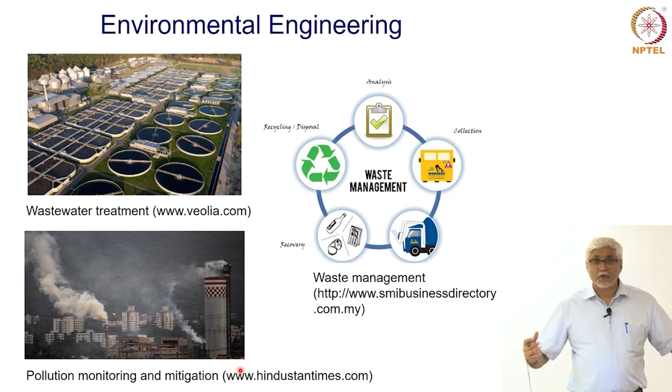Another aspect of environmental engineering is pollution monitoring and mitigation. As urban environments and cities come up, we pollute air, water and groundwater. Monitoring this and mitigating it is very important, because just knowing that this is happening is not enough. We have to see how to stop it and make sure pollution does not keep increasing, otherwise our cities will get dirtier, the air we breathe will become more difficult to breathe, and our groundwater will become contaminated and spread to the environment around these cities.

So environmental engineering does all this, aiming to protect and improve the natural environment where we all have to cohabit, work and live. It draws upon basic sciences like chemistry, biology and fluid mechanics, since these are required for designing and operating the systems built for providing drinking water and treating municipal as well as industrial waste. Depending on where the waste comes from, the treatment may be different. We have to see what the contaminants are and how they can be treated or handled before the treated waste is sent back into the environment.

This also brings up the very importance of a civil engineer knowing chemistry well. A lot of environmental engineering processes draw on chemistry and the understanding of chemistry as much as we are concerned.

The other aspect is monitoring and modeling of the environment. There are many processes that we have to say how they will evolve over time, so modeling is very important. We have to understand the phenomena and see how they will affect the world in future. How much will temperature increase? How much will the carbon dioxide in the air increase? And if so, how are we going to stop it? How are we going to limit it? And how are we going to mitigate it?

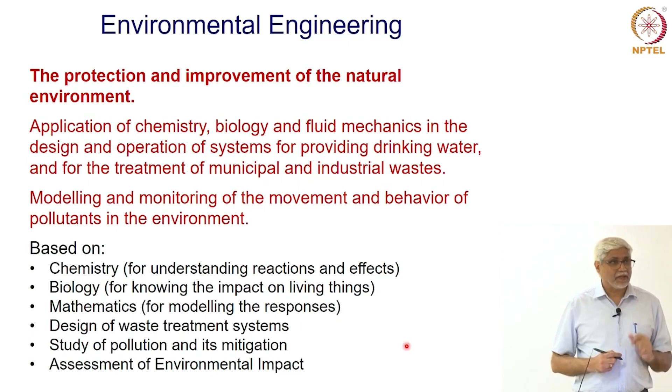And as I said, the different areas that we have to understand include chemistry - there are reactions, effects of these reactions have to be understood. Biology, because we are dealing with not only human beings but many other living things on the earth along with us. Mathematics is needed for the modeling. We need sophisticated models sometimes, which depend on many aspects of the environment to tell us how the pollutants will change, will spread, and how pollution will increase, for example.

And that will lead us to, for example, the design of wastewater treatment plants. For that, we will have to know where it's going to be situated, what waste is coming in, how the population producing this waste is going to change with time, and therefore see what would be the adequate design for the wastewater treatment.

I have already talked about pollution and its mitigation, and finally an important aspect of the design of almost everything that is large is the environmental impact assessment. When we have a large project, say a new township coming up, or a dam, or a canal, it is almost necessary to have an environmental impact assessment. How is this going to affect the environment in general? What are going to be the emissions? What are the resources that are going to be needed? And how will this change the environment where this is coming up? So this is again something that environmental engineers do.

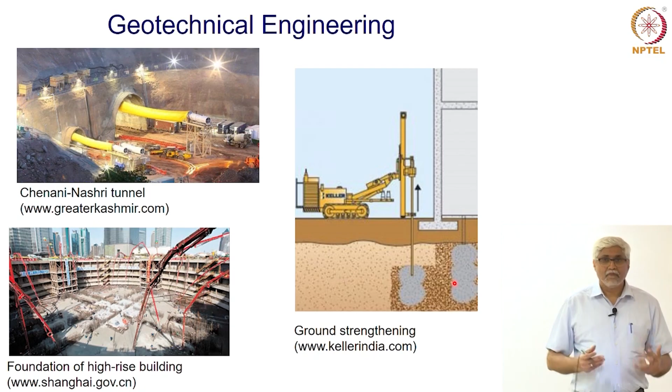Also, we have to understand that the earth itself can move - the ground can move when there is an earthquake, or when there is settlement. So we want to make sure it stays stable. There are techniques where you can strengthen the ground - ground strengthening techniques. If the ground is not strong enough for what you are going to put on top of it, can we strengthen it? You may not have a choice to say I cannot build here, I can move elsewhere. So we have to see how to make the ground strong enough for whatever we are constructing on top or within it.

Geotechnical engineers understand earth materials, whatever is in the ground, and see how to design safe foundations for structures that we are going to place on them or within them. So they analyze the behavior of soil and rock so that they can design these structures safely.

The structures could be high-rise buildings, pavements, underground facilities. We talked about tunnels. In India, almost all the major cities are having metro tunnels, and surely we will have these projects running for several decades in India and other parts of the world. These are structures which are mostly or at least partially under the ground. We have to make sure that the drilling process, the excavation is done safely, economically, and the structure once it's constructed is safe enough for transportation to occur through it. So underground structures are becoming more and more important.

We also need underground structures for containment of waste. Suppose we have radioactive waste, we have to store it safely. We cannot have leakages, we cannot afford to have this waste escape into the environment. So we need containment vessels, containment structures that will keep contaminated waste, or waste that could contaminate, in a protected place.

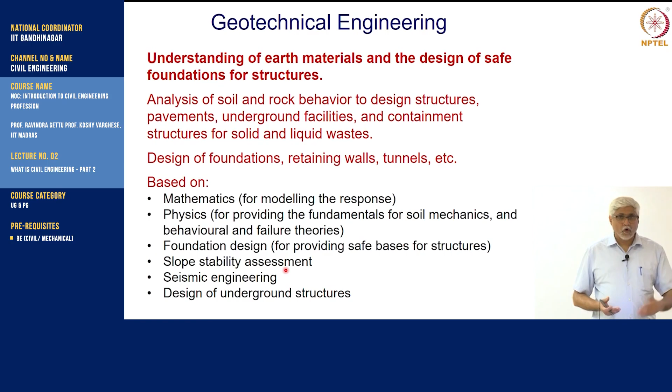Seismic engineering is everything to do with earthquakes. Earthquakes, as we all know, involve the shaking of the earth. It can be vertical, horizontal, and a combination. So if you have a structure sitting on the earth and the earth is moving, the structure could fail, the soil could become loose, liquefy, settle, crack and so on. We have to anticipate what could happen in a certain region. With more and more knowledge in seismic engineering, we are designing better our structures for such type of actions that come from earthquakes.

I have already talked about underground structures. The best example that is closest to most of us is metros. We use subways and we want them to be safe, because we cannot make transportation within a city without metros nowadays. So everywhere we have metro construction happening, and we want to understand the best way to construct and keep these structures safe.

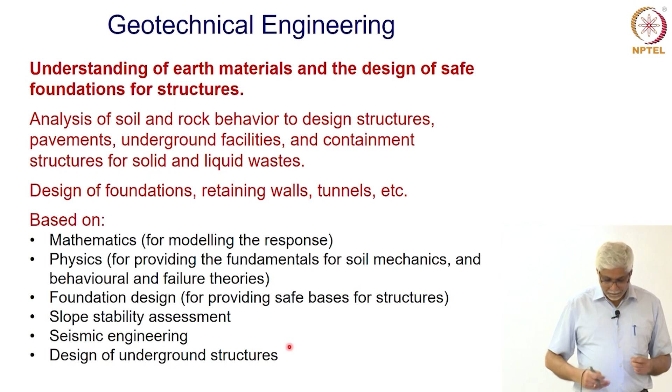Another aspect which deals with the ground is how water flows on the ground, hydraulics and water resource engineering. There are large structures like dams that have been built over the course of history. We still build large projects which involve dams, where water is stored for irrigation, drinking water purposes, and also to generate electricity. It is one of the cleanest ways to generate electricity. So we have several large hydroelectric projects which provide this pressure due to the buildup of water that can be used to generate electricity.

These are all massive projects because they involve making a huge reservoir that can collect the water, and the impact on the environment and on people is tremendous. So they have to be done properly and safely.

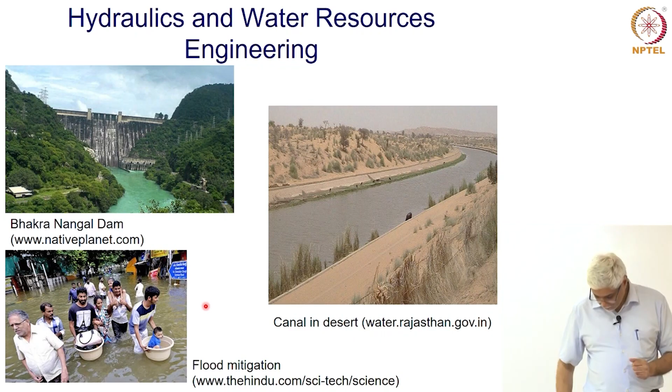So there is a lot involved in storing and conveying water. On the other hand, we are also worried about protecting too much water from coming into the city and destroying the city and its people. So the hydraulics and water resources engineers apply analytical methods, computers, and fluid mechanics to the study of flow of water and controlling this water, so that we use it when we need it and it does not harm us during its flow.

So flow and control is important, and we collect water, like dams, as I said, is a way of collecting water. We can have tanks and other facilities, and then supply this water where it is required, and this same can be extended to other liquids. There are civil engineers who work on the flow of blood in the body, because it is also a fluid. So there are many fluids other than water where these principles of hydraulics can be used, and civil engineers also work in these areas. They mainly do the design of hydraulic structures and machinery that is required for controlling water and moving water.

They spend a lot of time studying rainfall, especially in a country like India, where we have a lot of areas where we do not have water readily available. So we have to study when will we get rain, how much rain, and how are we going to store and use it properly, so that we can control its flow, decide the flow, and collect it.

Disasters happen and a lot of it is because of storms and floods. And there are many hydraulics engineers who study storms, see how they move, and even predict and warn people that there is a storm approaching, that there could be a flood. So even though we have designed well, there could be something that is beyond our control. So we can warn people that a storm is coming, we have to evacuate, we have to be safe, we have to move to higher ground so that they are not affected by floods.

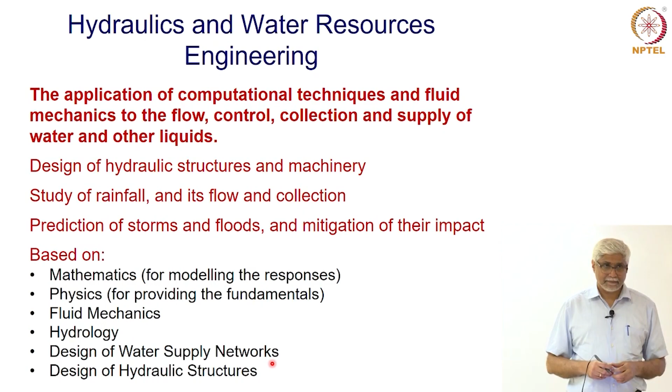So they base a lot of their work on mathematics, a lot of analytical work is needed, physics obviously, fluid mechanics is a special area of mechanics of physics that deals with flow of water, flow of different fluids, and the pressures it creates during its flow. Hydrology is the study of flow of water on the earth, and they end up designing a lot of water supply networks. Our cities are growing, new cities are coming up, we need to provide water. So the water supply networks also have to be designed properly, as well as hydraulic structures like dams and canals. So these are the different areas that hydraulics engineers work on. Next we would come to the area of construction.

Construction involves resources, materials, and processes. So the people who are involved with construction materials have to decide what material to use, how much to use, and how to use it.

So a construction materials expert has to know which concrete to use, how much should be delivered, how it should be delivered, and the construction technologist has to see what equipment is required so that this material will be delivered correctly and on time.

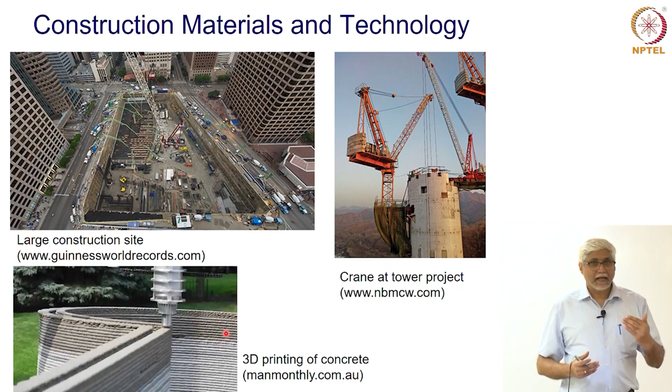So the construction materials and technologist will look at what materials and resources are required for the construction to be done properly and efficiently. The engineer who works on construction materials and technology looks at the utilization of the material and equipment to implement the design.

The design is given, now how best to implement it and make it happen. These could be structures or any other civil engineering project. They also have to take care of maintenance. Structures become old, facilities become old. How do we make sure they are in running and usable condition? When do we have to repair, and how do we repair these structures?

Design of new materials is very important. Just like our demands and requirements keep changing, we have to supply, we have to come up with new materials. So these engineers will look at new materials, construction methods, and how to improve the performance of the material. If we know that something is going wrong with a certain type of material, how can we make that better?

Quality of construction — we always hear a lot of complaints about construction not being good quality. So there are people who work on that and make sure this quality is improving. They draw on physics and chemistry to understand the behavior of materials, and understand what is there in the market, because in civil engineering you cannot use something very expensive that has to be brought from a long distance, because it makes the construction not feasible.

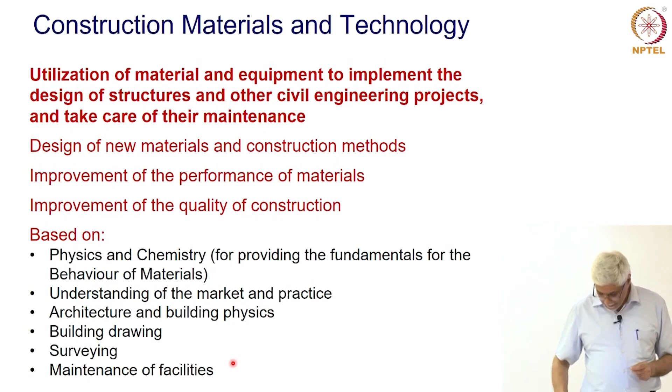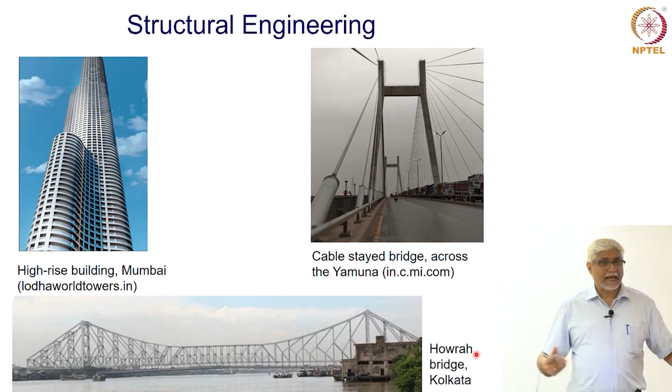You can have a steel bridge as well. This is a very elegant Howrah bridge in Kolkata, which shows the entire steel bridge and its skeleton, or the structure of steel that is holding it up. So these are things which are very impressive. They could be tens of, if not hundreds of meters tall or long, and they have to be designed in a safe way and to last for a long time.

So this is what the structural engineer does. The structural engineer analyzes the forces, stresses and deformations, and designs the structure so that it will resist the loads and any other action - the loads coming because of people using it, the weight of materials, movements due to wind or seismic action - and still last for a long time.

And when they last, we want to make sure it's functional. What do we mean by functional? It should be fit for use. If there is a bridge but it has deflected a lot, or as the car is moving across it, it moves 1 meter, it may not break, but it is not functional. Similarly, if you sit in a building and for the least wind you can have, it moves a lot, nobody is going to use the building. It may not fail, it will be safe, but it's not functional. So functionality is very important, and later on when you study more courses in civil engineering, you will hear this concept of serviceability - that it should be good for service, good for use.

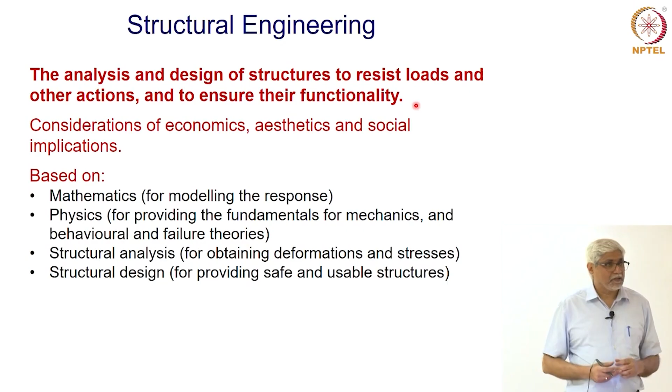Obviously, all this has to be done within certain constraints of cost. It should look good, like the pictures I have shown you, showing the elegance that can be brought out in a well-designed structure. And the social implications like ease of use, comfort - people should feel nice about the structures that they live in and work in.

So this again depends on the knowledge of mathematics to model the response of these structures, and physics, very important for understanding the fundamentals of mechanics and the theories of failure and behavior. This leads on to structural analysis, which looks at deformations and stresses for given loads, and this is followed by structural design, where the concept is taken, the idea is taken, functionality is built in, and translated to something that will go to construction for the construction manager to start executing.

Transportation, as we all know, is very important. We use different modes of transport. Here we have some networks that I have shown. This is the expected national highway network of India, where several thousands of kilometers still have to be built to create this grid that connects different corners of India.

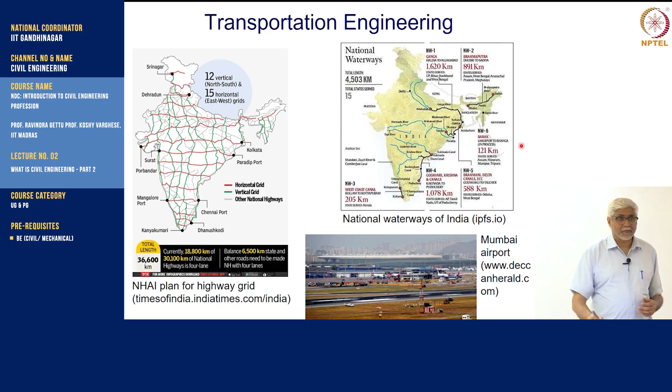Similar to roads providing modes of transport, waterways can also provide ways of transport. Now in India, we are looking more seriously at water, canals, waterways as modes of transportation, because we can transport goods very easily. This is done in many other countries, but in India now we have to work seriously on creating waterways where goods can be transported very cheaply without competing with the transport of people. This could be a mode dedicated to transport of goods.

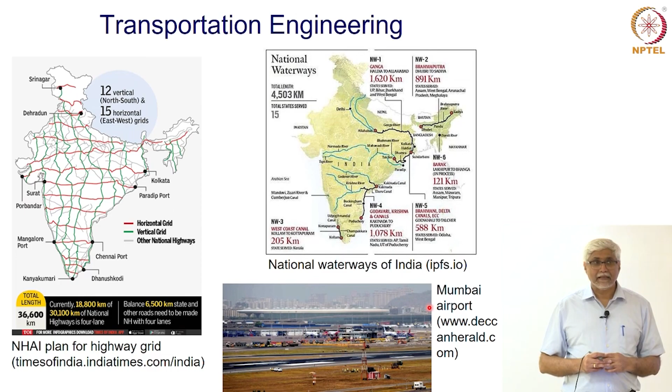Other aspects of transport are also important. This is the Mumbai airport. More and more airports are coming up, in remote areas, hilly areas, difficult to do construction in, but all this is important for providing the network for moving people, moving goods, and keeping businesses and life going as we want them to.

So the transportation engineer takes charge of planning, designing, and managing all the systems used for moving people and goods. So they complete the cycle of taking care of planning, constructing, designing and managing. They analyze the movement of people and goods, make projections for the future, because population is increasing, we know cities are going to become denser, so how should our system also evolve?

They design traffic management systems, and anyone in India would appreciate how complicated it is to design and plan something for an Indian city to manage traffic properly. They trust their mathematics skills for modeling traffic flow, and they have to understand physics and chemistry to understand the behavior of materials used and which material to use where. Should a pavement be asphalt or cement concrete? These are questions that come up, and they have to understand the physics and chemistry.

Their computational skills are very important. We have transportation engineers who are all the time looking at computational models to predict how traffic will change and evolve, and how to manage it efficiently so that people don't waste time in transport.

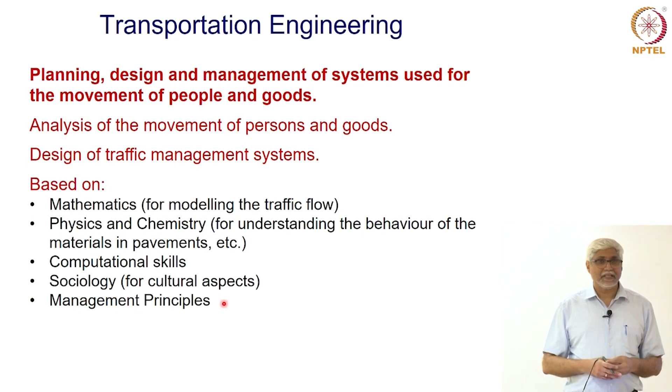Social aspects are important. Will people use one mode of transport or not? When will people stop using bikes and start using a car? Will they use an auto rickshaw or go by bus? How can we make them use mass transport, public transport, instead of their own car? These are sociological aspects they have to study, along with management principles, because a lot of these projects are huge. You have to manage money, plan properly, and see what is the policy and priority for construction of such systems.

There are new modes of construction management. For example, what is called public-private partnership, where if you have a public facility, not all the money comes from the government alone. The government partners with a private group, which also puts in some money and charges the users, and that way they finance the project. These are called PPP, or public-private partnerships.

You must have seen many cases, like highways with a toll booth. They collect money from you for using the road, and that money pays back what went into the construction. Possibly once they have collected all the money, it becomes free for other users. So there are several models, which construction managers look into to decide the best model and how to manage such projects.

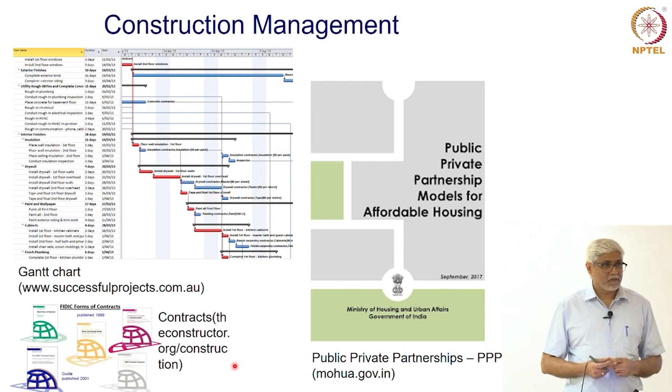Contracts are very important. A contract is an agreement between the different parties in a construction project, between the owner, the contractor, and the bodies that are administering. There is an agreement saying that for so much money given, they will do the work in a certain way, comply with the rules and specifications. So how do you write contracts, and how do you deal with contracts that go wrong? There will always be problems, there will always be something that went wrong. How do you deal with it? These are things that the construction manager does.

They plan, coordinate and control all civil engineering projects, and look at equipment requirements too. They design formwork, where you pour concrete so it takes the shape you want in the structure. Scaffolding is the supporting part. If you've gone to a construction site, you'll see a lot of poles holding up wooden elements where concrete is poured and kept in place until it becomes strong enough. So scaffolding is anything that supports something, and can also support people working at a construction site.

All other construction equipment, we talked about cranes, there could be excavators. A lot of equipment is now required on a construction site. Robotics are becoming very important. You can automate, you don't need people all the time to construct. You can have sophisticated equipment controlled remotely by few people, instead of having many laborers at the construction site. Very importantly, a good construction manager should be able to manage time, money, and other resources.

They should deliver a construction site without delay and safety issues, and make sure it's a safe site. So they have to manage labor requirements, money and time, and deliver good quality without safety problems. Again, modeling is very important, and maths is important.

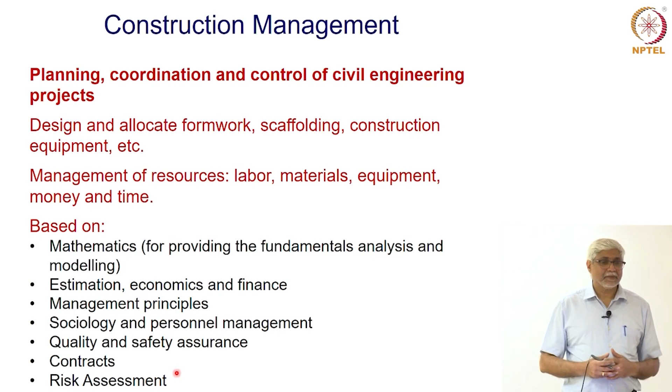The last specialization I want to talk about is urban planning. Urban planners decide how a city will grow. They coordinate how a built environment will develop, how new cities will develop, how cities will transform with time. They look at road networks, where green areas should be, where should we have parks, recreation areas, and how should be the combination of residential, commercial and industrial spaces.

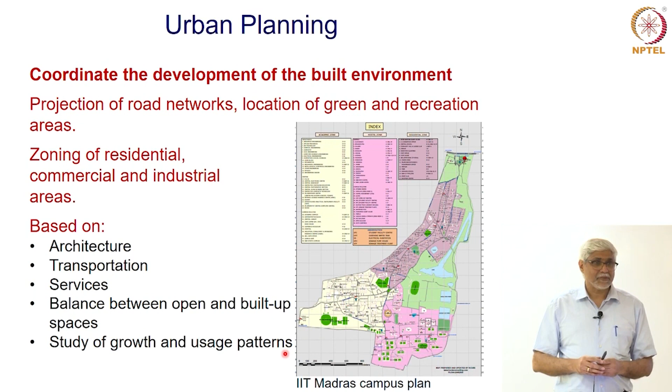So these are the different specializations of civil engineering, and it gives you a flavor of all the different aspects we need. I have also tried to highlight what you have to know to become a specialist, why we have to understand maths, physics, chemistry, biology and other sciences, because they form the basis for what we are going to do later. If you have to analyze, you have to know certain things before you do it. That is why you start off with revision of basics, strengthening the basics in many aspects before you go deeply into civil engineering.

So to end this lecture, I thought on a lighter note, we will see some things which are put up as jokes about us civil engineers.

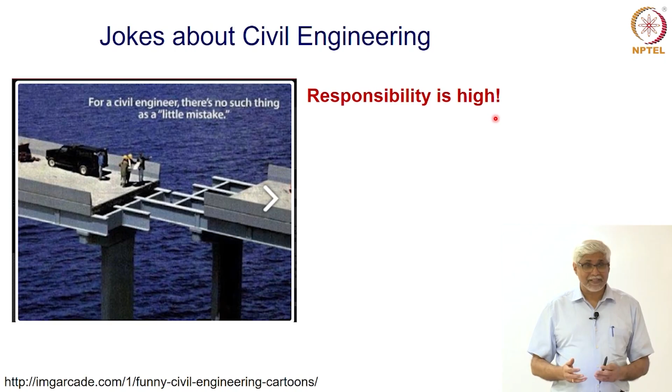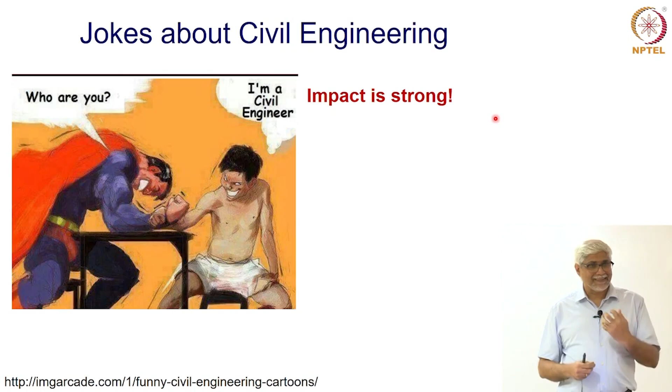So the impact is very strong. Here you have Superman trying to arm wrestle a civil engineer who doesn't look very strong, but he has so much in him that he has that impact which is possible. Civil engineers control so many things. If they do something, it has an impact on a lot of things. So the strength is inside, it's inherent to the civil engineer.

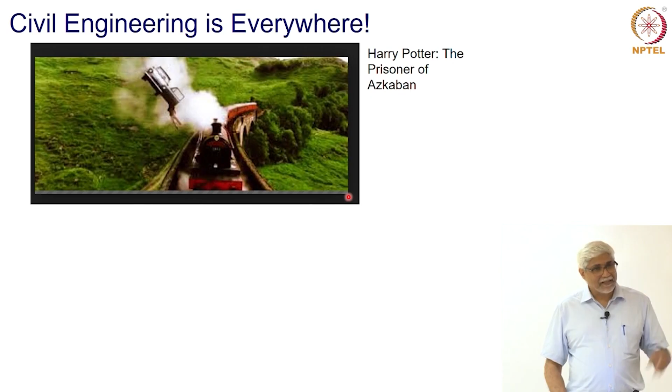Further, civil engineering is everywhere. A lot of you would have seen Harry Potter, right? This is a shot from The Prisoner of Azkaban, where Harry and his friend Ron are flying with his car, and below them they see this very nice bridge. You might have noticed the car, but you may not have noticed the bridge. This is that bridge, a real bridge in Scotland, built more than 100 years back, 380 meters long. This is the Glenfinnan Viaduct, 21 spans, constructed with mass concrete, no steel, just by the form.

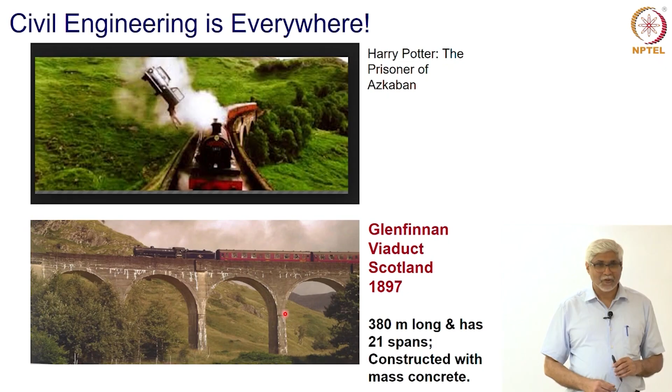We will talk later about architecture and structural analysis. Just the form was such that it needed no steel, and just the concrete could take all the loads and last for more than 100 years. So you can imagine this was the Hogwarts Express, and it needed this bridge to take Harry Potter and his friends to school. So civil engineering is everywhere.

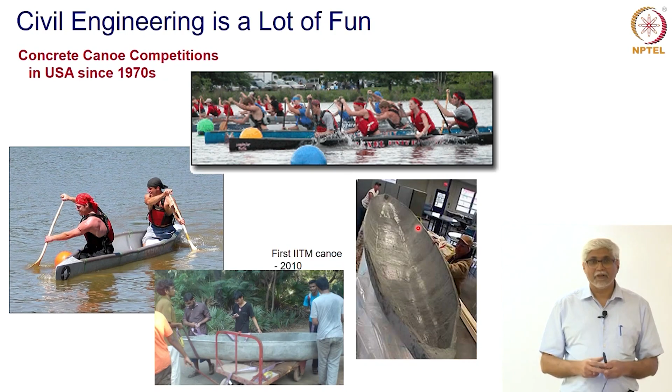These type of things challenge you, because it's not normal to think of a concrete that will float. Concrete is supposed to be massive, holding a lot of weight. But here, on the contrary, it has to be strong enough that it cannot collapse on water, it should not leak water, and it should be safe for people to travel. So concrete and civil engineering, construction, can be a lot of fun.

I'll stop with that. Thank you very much. The idea of these two lectures was to introduce civil engineering before we get to the different disciplines and talk about each of them in detail. In the following lectures, we'll have different faculty members of IIT Madras talking about their specialization, so that you would know more about these specializations, what they concern, and see illustrative examples. Thank you.